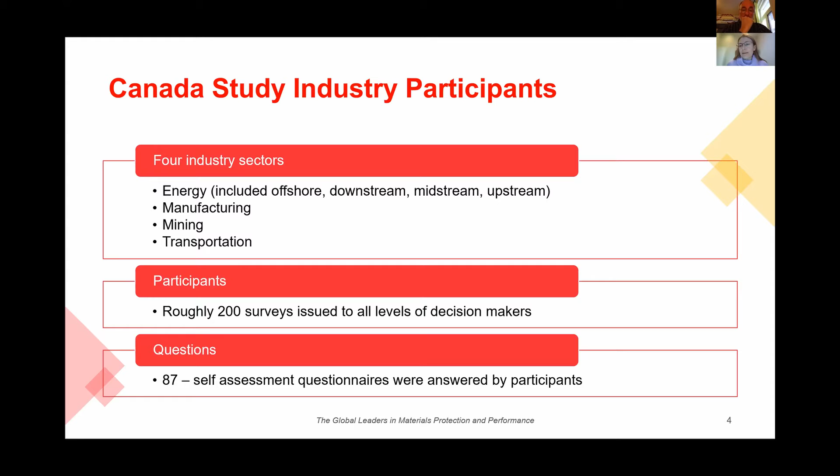So how did we come up with these domains, or how did we know which domains we wanted to check? There are 10 domains. When I said we were doing some stuff that has never been done before, I meant the sustainability portion. This is the first study, the first time that a study, not the global one, not the India one, not any other study, has ever looked at sustainability. It was a standalone portion of the project, so it's a huge deal that we are looking at that area right now.

Other than that, we looked at policy, stakeholder, organization, accountability, resources, communication, corrosion management practice integration, continuous improvement, and performance measures, so KPIs basically. Along those 10 domains, we evaluated the whole life cycle of the asset, from design to abandonment. So we looked at policy in the design phase, in manufacturing and construction, operations, and abandonment. All of those areas, and then like that for all 10 domains.

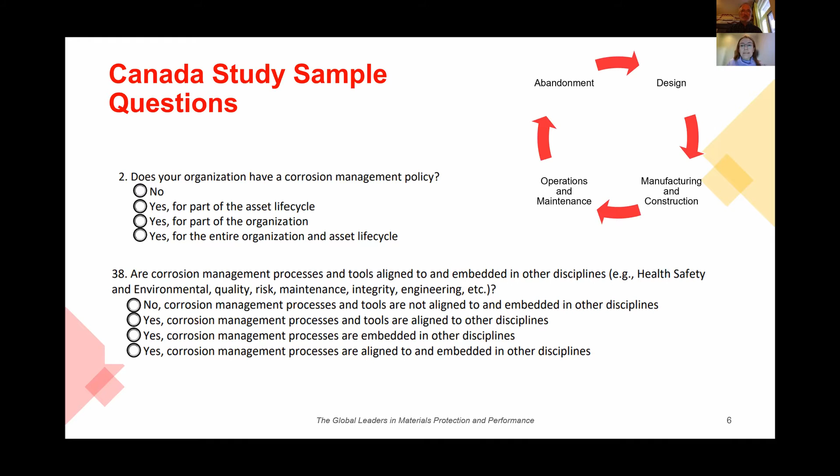So here it is: how much does corrosion cost in Canada? $52 billion US dollars, that's like 63 billion Canadian, roughly. What's very impactful to see, and what I want you to retain, is that this number has increased around 20%, 21% to be exact, from the 2009 study.

You can argue, yes, but we have more infrastructure and more ways to measure and report. And yes, but we also have more development in technology, more tools for inspection, brilliant people doing PhDs in corrosion. So we have the tools, we have the people, and still we're having lots of problems and spending lots of money on corrosion. That number equates roughly to 3% of Canada's GDP, so it's a huge number.

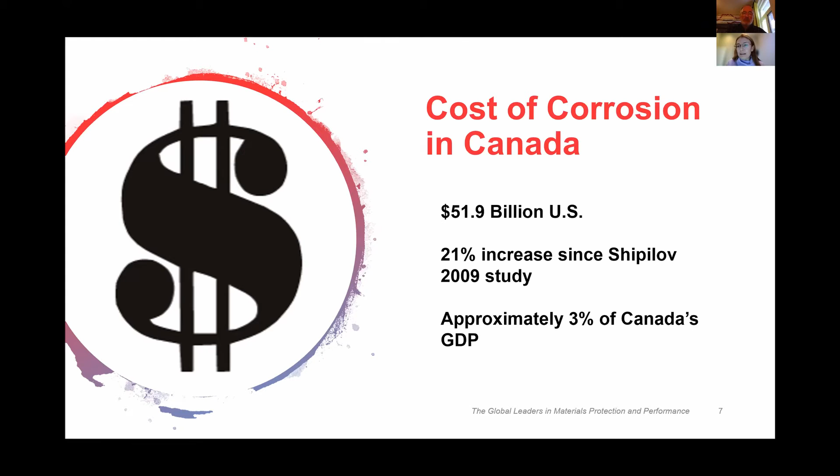Now, what will you say if I tell you it's been discussed, analyzed, and proved that if we don't invent anything more, just use what we have right now - the technology, the people, the tools - we can save between 15 and 35% of that number? That's huge, like 7 to 18 billion, just using what we have right now. So it's something to think about.

So one question is, how do we compare to other countries, how do we compare to the global numbers? Roughly, we are not better or worse, we're just in the same ballpark. If we compare to the US, with all the people they have, they arrived at 2.7, so we're roughly the same but with less people. We pride ourselves on being more conscious, on doing better jobs and doing things in a slightly better way. So that's kind of where we are on the scale.

So the question that comes up is: if we use the technology, the tools, the people we have right now, and we're not doing it, then what is the missing part? What is that missing piece of the puzzle that will make us better at what we're doing? We ended up concluding this needed to be a cultural change.

Just like health and safety was one time - people were operating not in a very safe way, climbing into pipe racks without even having a harness, and Sandy is laughing because yeah, we've seen it before - and then it became cultural. It became that you come home, put up your Christmas tree, and suddenly you're checking if the ladder has the locks on, using 3-point contact and all that, right? So it becomes cultural. We're hoping this gives us tools for this to become cultural, to become part of the organization's culture. This is important, not only for money, but for what we can save for the environment, for people's safety, and ultimately, obviously, get some savings in the end.

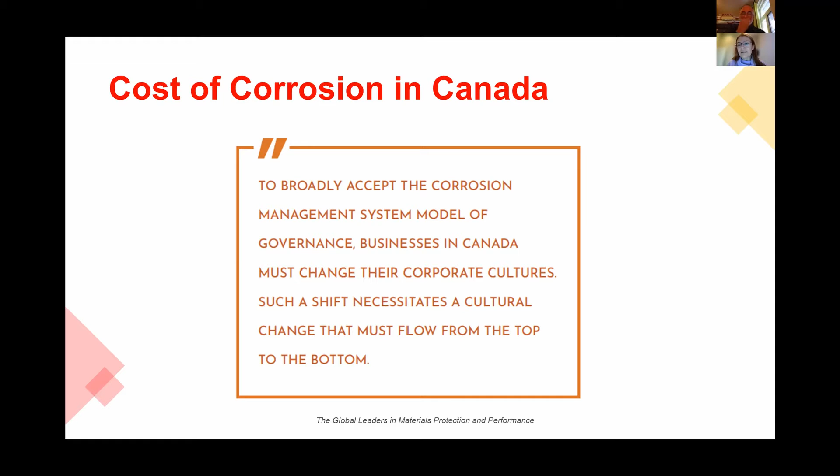Can it be prevented? I'm going to show you some case studies for that.

So remember the 10 domains I showed you some minutes ago? This is how we do good. We do good in continuous improvement, we like to improve, we like to do better. We ask ourselves, we give feedback, that's good. Corrosion management practice integration, we seem to be good as a Canadian culture on this one. Where there is a lot of room for improvement is in policy, performance measures, and stakeholder integration, specifically in the manufacturing and abandonment phases. What does that mean? For example, do your contractors really know the importance of what you're doing? And if they don't commit to this culture or these engagements in corrosion, what can happen, and what is the outcome of that?

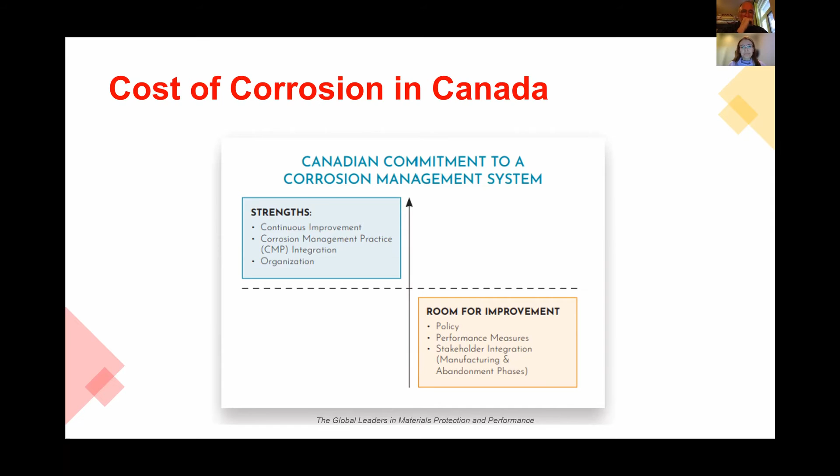So these are real case studies. They were written and then shared within the study. In a nutshell, I'm going to present three of them. Sandy will present another one, and then we'll dive into the sustainability portion.

So this first study -- pardon me, I'm just going to go back a little bit. When we say corrosion and corrosion management, a lot of people think of the refineries, the midstream, the upstream, the chemical plants. We don't think that this can affect a lot of infrastructure as well. And we know that there are other countries that have a little more control, and they have procedures and things in place that will help. For example, municipalities, when they build bridges or overpasses and things like that, they will help in making those decisions with a mindset of long term.

So this one is a great one. It's from the city of Calgary. It happened in 2004. They had a really big failure, released many liters of water, impacted around 100,000 citizens, and flooded many of the roads and houses and things like that.

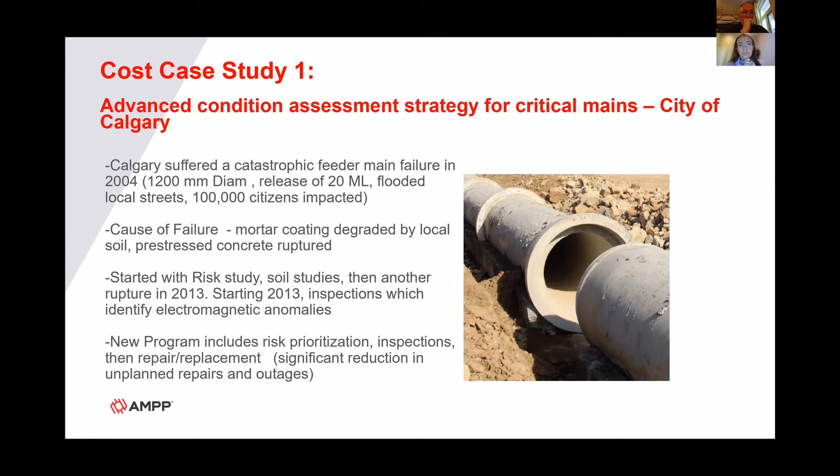That resulted in a significant reduction of unplanned repairs. They can plan now for repairs. They don't have affected people, they don't have complaints, and they're not affecting 100,000 citizens for something that could have been prevented. So that was a good one.

The second one, also in a municipality, is the city of Vancouver. Many bridges, many constructed in the 50s, some in the 30s, lots of them actually in the 30s. This one I like a lot, because what they are doing right now evolved from what they did after the 2016 audit. Someone read it and said, okay, this makes sense to have people and to have things looked at. So let's do this in this way.

One thing I like about it is that before they started the program, the contractors were going coat over coat over coat of paint, and that wasn't really the solution. So what they found is that if they do the assessment, train people, and make them understand the importance of what they're doing, they get better results. And that's exactly what they did. They trained people, changed the manuals, changed the procedures, and now they're operating in a way that is helping them.

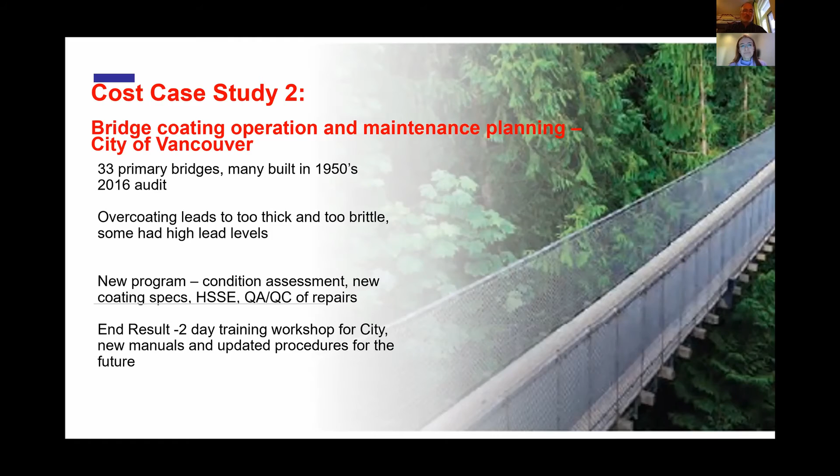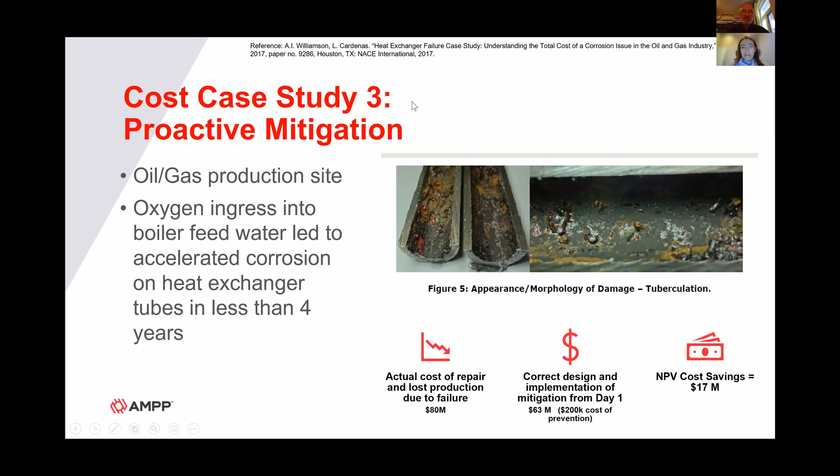Sorry, I was on mute. It happens all the time. So as I said before, okay, let's start the sustainability part, just let me know and I'll continue. Go to next slide. I don't know if people can see my smiling face or whatever, but that's fine. I see your smiling face.

Anyway, okay, let's talk about sustainability a little bit. This is something I've personally been campaigning on, I guess, since the time I was president in 2016. Sustainability means a lot of different things to a lot of different people. What I'm going to try to do quickly today is introduce what sustainability means to us as corrosion professionals. It's a bit of a buzzword, but let's make sure we understand what it is. So could you put the next slide on?

That statement came out in 1987. So it's been thought about, but even more and more, whether you want to talk about climate programs and this, that, and the other, this is really more to do with material usage.

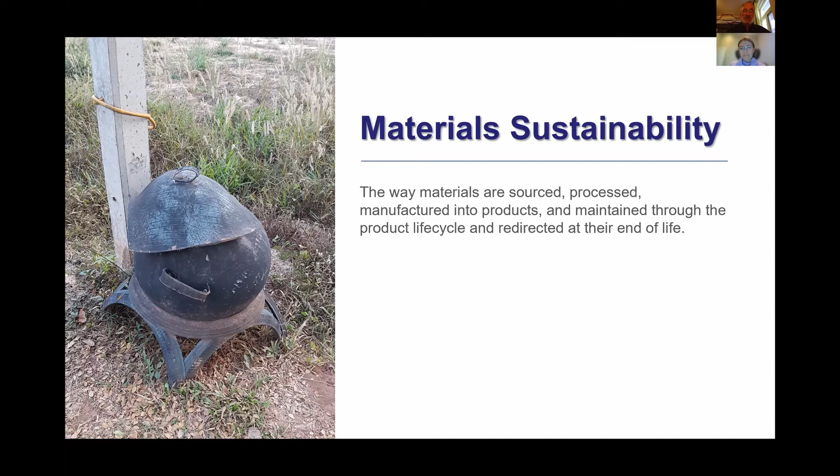There's another concept, material stewardship, very closely related to material sustainability. Basically, material stewardship is more to do with managing the flow of materials into society, thereby improving its sustainability by mitigating environmental, economic, and societal impacts and maximizing the efficiency and durability. So it's being a good steward of how materials are being used.

There's a few papers that have now been presented on the NACE forum. We've actually had a few symposiums by now at major conferences. Chris Taylor and co-authors have basically come up with a 4D approach. It essentially is ways to look after materials better by making them more durable, maybe having less material in a particular component, and designing materials so they can be used through multiple life cycles, not just one life cycle and throwing it out.

Then finally, are there waste streams that come out of a particular industry plant or industry that could actually be used as a feed stream to another process? I'll show you a good example of that here in a second.

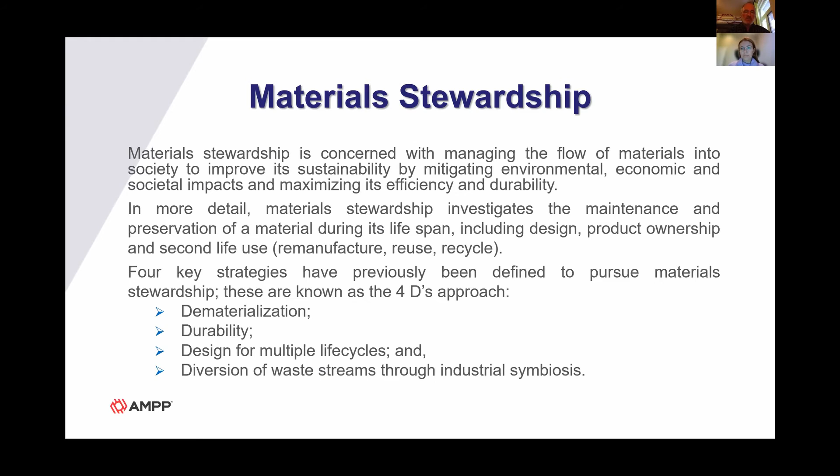As Monica had mentioned, the NACE impact study, which was released in 2016, did a fantastic job of making not only corrosion professionals, but making the management in their organizations aware of the cost of corrosion. It basically put a lot of what we do into dollars and cents so that we could help them see the merit of having a good corrosion management program.

But what we did with the cost of corrosion study in Canada, we also married that with the concept of sustainability. By asking 10 questions in our survey, we thought, if we're going out to ask them about corrosion management, why don't we tack on a few more questions about sustainability and see how that fits in with things? And that was very interesting. The results are all in this report. It's going to not only highlight the value of a corrosion management program, but also how to look after materials better and be a better steward of those materials.

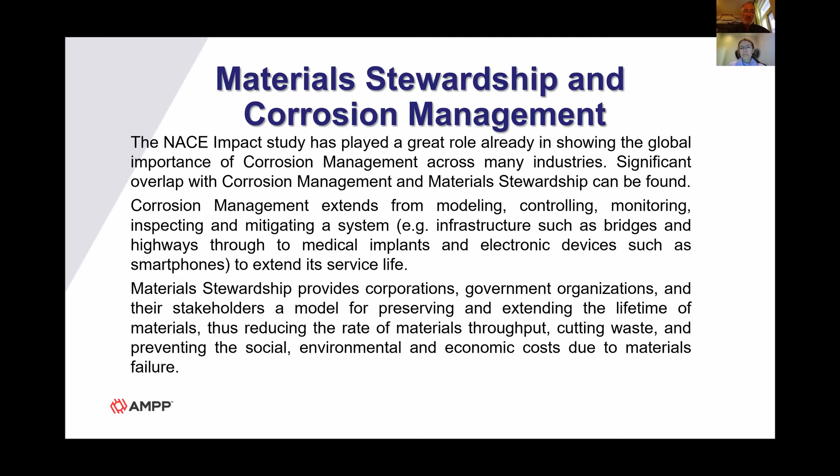So I want to introduce one more concept. I think a lot of the audience will have already heard of cradle to cradle as opposed to cradle to grave. Basically the cradle to cradle concept is the basis of a circular economy.

On the left-hand side of the diagram, you see a biological cycle. This is what Mother Nature, Mother Earth, does very well. Right from producing something, using something, it biologically degrades, say on the forest floor, it becomes a nutrient, sustains more plants, which then grow and can be produced for use, the trees or whatever. On the right-hand side, we want to try to use those same concepts and ideas in a circular fashion. So when we produce something, there's a heck of a lot of energy that goes into actually making something the first time.

If we have to remake something over and over again, because we have more of a linear type of economy where we take something, we make it, we use it, and then we throw it out, that's a tremendous loss of energy and all that goes along with that. There are a lot of clever people around the world finding ways where we produce something, use it, then return it.

The most obvious thing is recycling. But in some cases, things can be taken apart. They've been designed so that they can be disassembled at the end of their use, and then provide raw materials and parts for remanufacturing. There are many examples if you look up the circular economy, and I think more and more we should be thinking this way in industry.

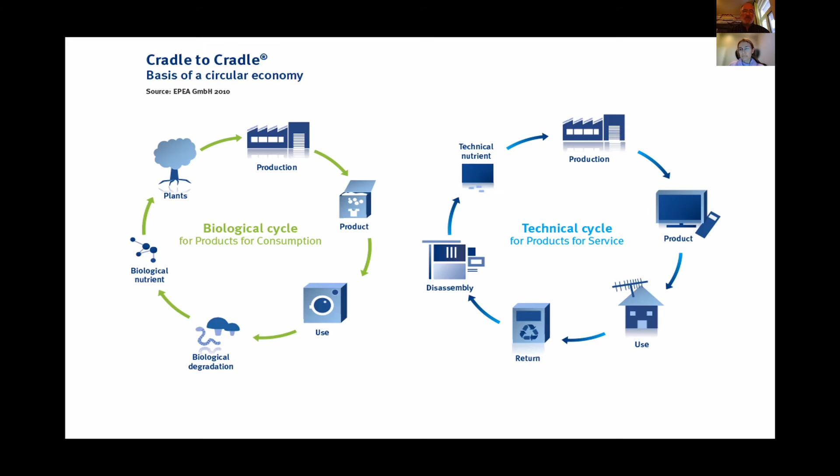Okay, next slide please. This is a bit of a busy slide, but this is really what it comes down to. What you see here is a number of totally different plants—one producing Gyproc, another energy or biogas, or whatever.

But this is really what industrial symbiosis is all about. It's where you're taking streams that you previously might have dumped into a river or maybe up into the air, and yet that waste stream has certain value to another plant.

If you look at this diagram in more detail—and this is referred to in some of our articles—it shows that one plant found they were throwing something out, but just down the road there was another plant that could use it. So they made some profit from that, and the waste wasn't created, it was used by somebody else. There are many examples like this.

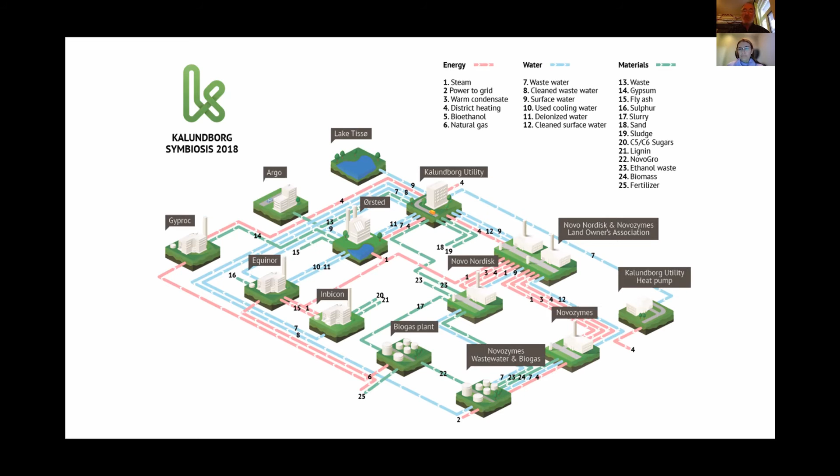So I think that was the last slide, was it? I don't have the guide in front of me. Oh yeah, I'll give it back to you, Monica. Thank you, excellent, thank you Sandy.

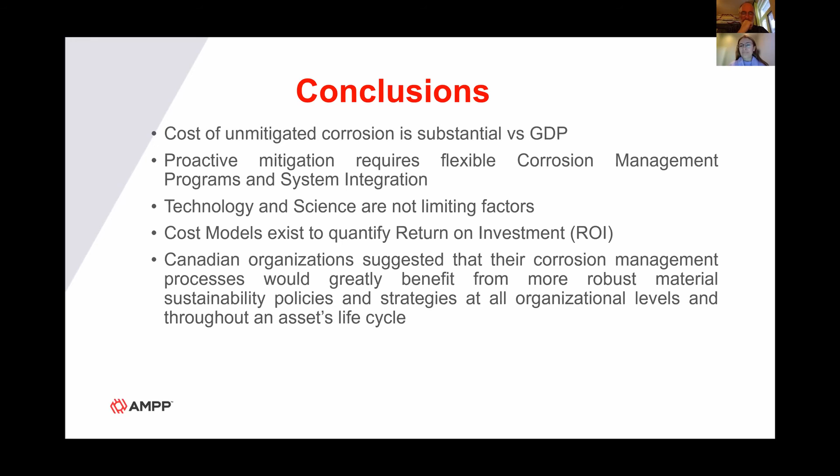So with that, I don't have any more slides other than this. How can we help you? What is the goal of this study? What little questions do you have popping right now in your minds?

And we have reiterated along the little talk that we have had here, Sandy, myself. This is publicly available. If you don't find it, if you want to discuss more, just come back our way. If you find this very interesting and you want to have a talk in your company or within another organization, come back to us. We'll make sure that happens. If you think this will be worth it, going and talking to someone, let us know.

And right now it's the time for questions, I guess. So Brett, back to you.